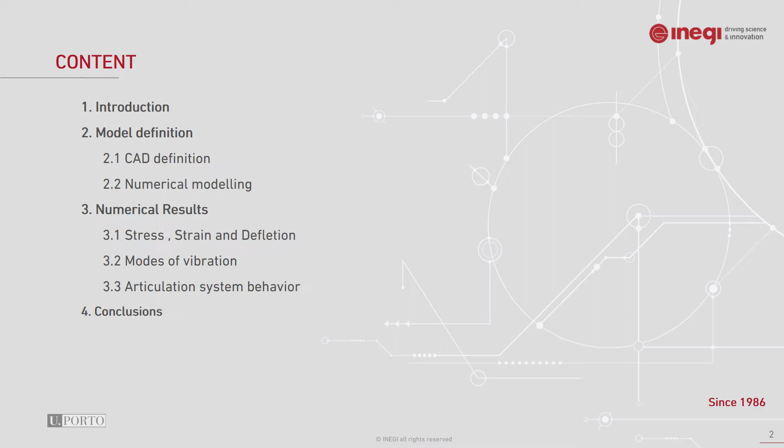Here we present a resume of motivation items for the research here reported. Essential details focus on sustainable mobility, this one making the obvious choice of electric power, lightweight and robust body design, optimized 3D frame type structures possibly, investigation of dynamic force effects on a proposed vehicle body structure. More details you can read in the present paper text. Here, this presentation is shortening the message not to be boring for you.

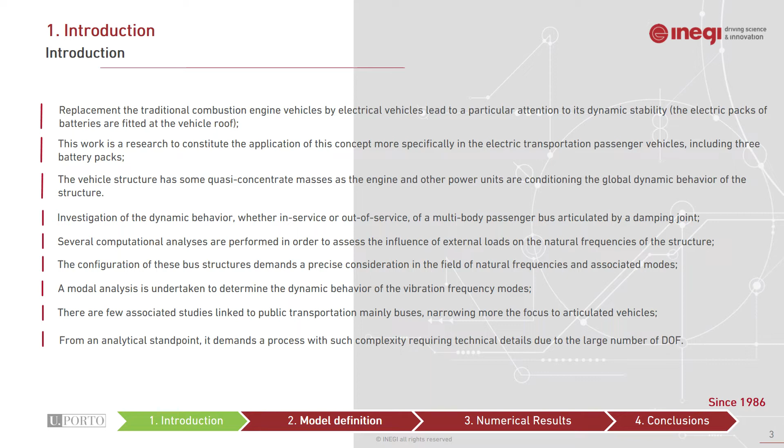Here is depicted a resumed description of an articulated double-body bus about its model characteristics. Each module was modeled as a solid rigid element where closely similar dynamic characteristics as the weight, 3 main coordinate axes, inertial moments, mass center position were sought to match the real vehicle body characteristics.

The problem's outline enhances the attention to a dynamically coupled problem or multi-body dynamics study. Two bodies, assumed as rigid, contact the road via the vehicle suspension, being both modules connected by a specific design, towing double-hinged bar with a damping system for safe road driving control.

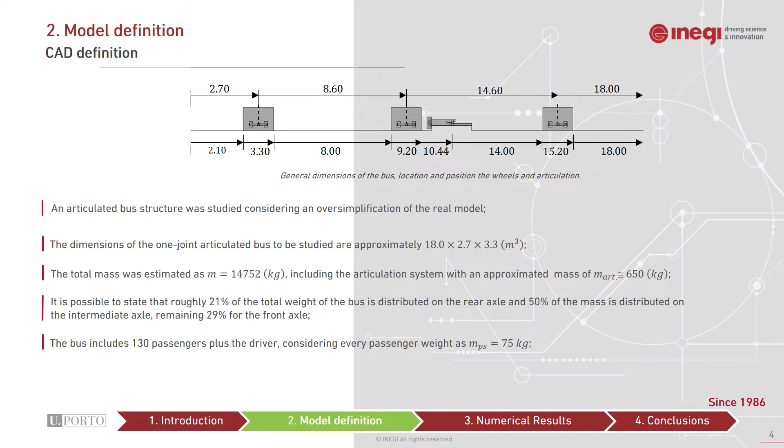Passenger seats and interior isolation material were converted into uniformly distributed masses, while battery banks, if applicable, were considered as partially distributed masses. Proceeding with the dynamic model, we assign the equivalent spring stiffness suspension to each vehicle wheel, having worked as follows.

A. Vertical spring stiffness suspension, radial load, is a series type spring association combining the radial load tire stiffness with the one due to a pneumatic vessel reinforced rubber suspension, respectively K tire and KB.

B. Additional spring stiffness factors existing in the horizontal plane refer to acceleration and braking forces, and they are tangent to the tire external circumference. Also, a transverse force acting normally to the tire circumferential plane completes the force system acting on each wheel.

This last force results of a drift or shear force by lateral loads acting on the vehicle. Take, for example, the effect of a centrifugal force in curved trajectories and lateral wind pressure. This stiffness and the one resulting of acceleration or braking forces have similar expressions.

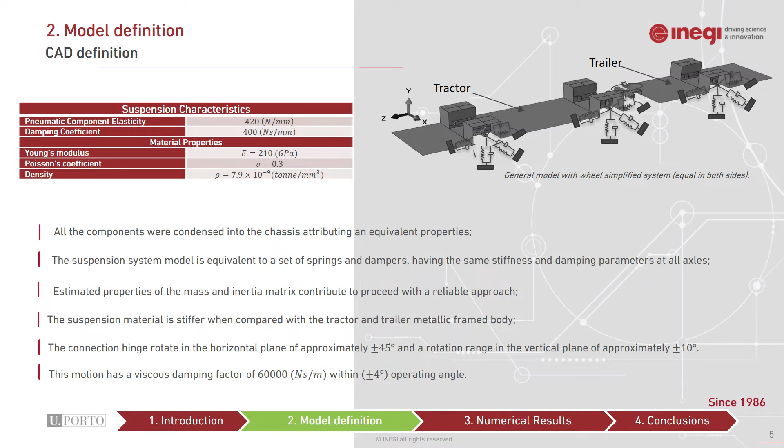Procedures for model simulation. The case study consists in evaluating the modal spectra of two bodies linked by a partial constraint double-hinged towing bar. This device allows only some free rotations, but practically prevents the relative rotation of truck and trailer along the longitudinal axis, for sake of passenger safety and internal vehicle geometry conservation.

All the remaining rotations, though free to occur, have viscous type damping forces by special actuators controlling their amplitude and eventual self-exciting vibrations.

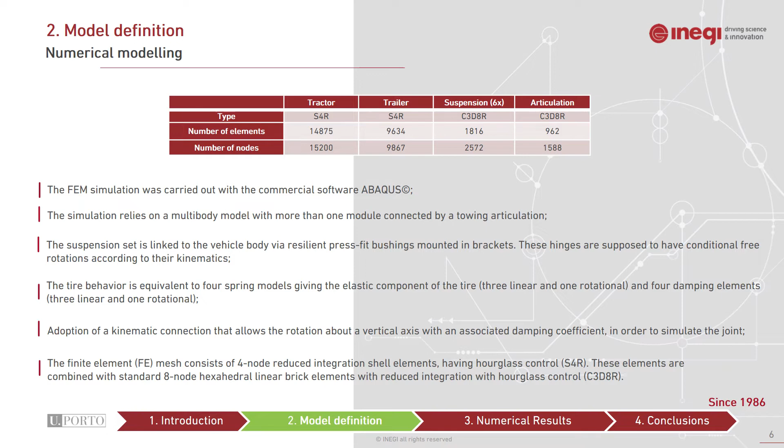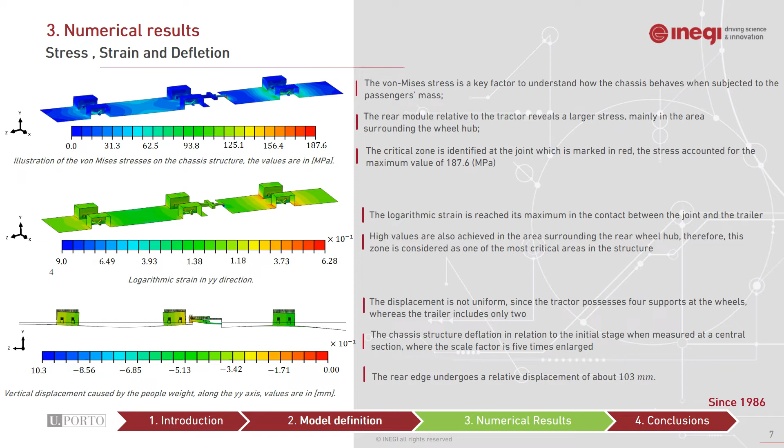The multibody dynamic model required accurate calculation given some rigid body motions by coupled kinematics at the towing hinge bar. Such modes are associated to define the frequencies due to individual stiffness mass characteristics for the tractor and the trailer. However, the two bodies are connected and conditioned by some rotation constraints.

Then, relative oscillations occur only at the vertical symmetry plane and the horizontal plane, this occurring by curved trajectories. There is no relative oscillation over the longitudinal axis of both bodies connected.

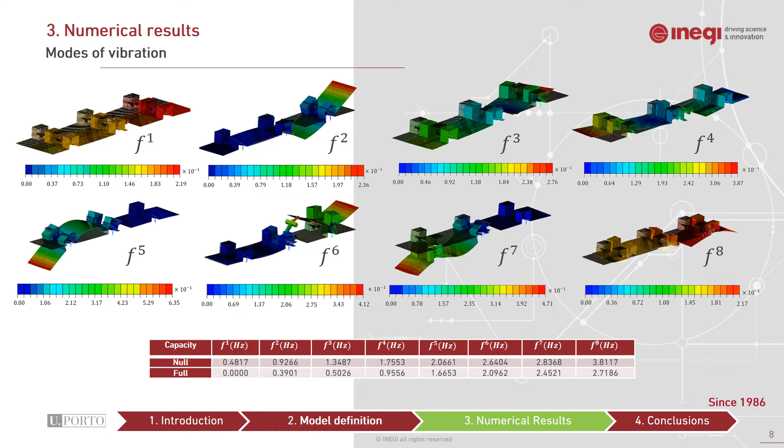This slide reminds in some sense previous data alerting the coupled bodies oscillations that are permitted via the towing double-hinged bar. It is recalled that this towing bar has two viscous type damping actuators preventing self-excited lateral oscillations due, for example, to effect of lateral wind pressure, this eventually leading to less safe straight-run driving.

An additional note left here, it is recalled that frequencies higher than the 8th order previously mentioned modes reflect now the vibration of the body frames, now showing a non-rigid yet deformable body structure. Such excitations can now result from higher frequency road irregularities profile or a lesser mechanical condition of engine supports to chassis. This is applicable in case of reciprocating motors, of course.

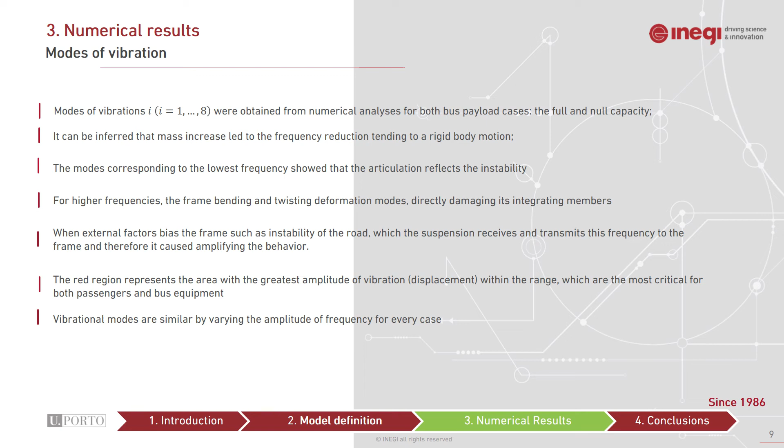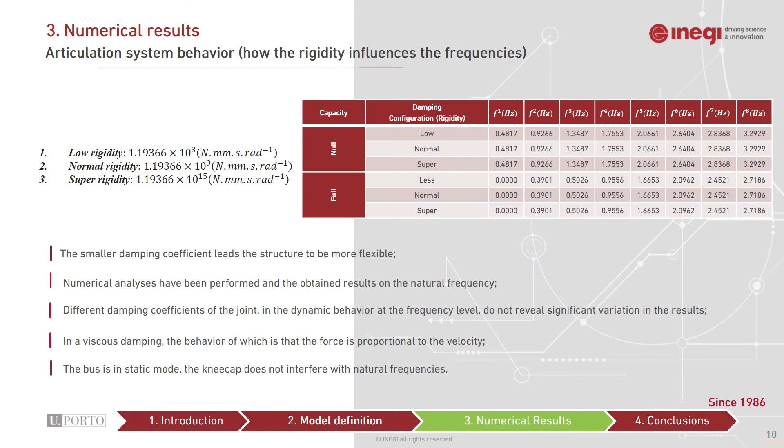This slide discusses the influence of the damping factor of viscous force dissipation actuators fitted in the towing double-hinged bar. It is seen that a damping factor with a base value of C about 1.2 times 10^3 newton millimeter second per radian, calculated for an angular velocity at mutual rotation of the extreme hinges, has practically no influence in the frequencies detected for the lateral oscillation or vertical oscillation of the vehicle.

Conclusions and future research. It is important to note that this work does not present any novel technique or model for dynamic analysis of special design passenger vehicles, as is the case of a double-body articulated vehicle. The numerical analysis for the vehicle natural frequencies led to useful technical information. The lowest frequencies are dependent on the suspension stiffness and damping characteristics.

The highest frequencies of the vehicle dynamics are dependent on the body frame mechanical characteristics, and there is a considerable difference between natural frequencies of the vehicle suspension and those assigned to the vehicle body frame. In large size and heavy passenger vehicles, low natural frequencies are desired for sake of passengers' comfort, but this may render some instability in driving for running on less smooth tracks. Suspension stiffness control is then desirable with most recently developed pneumatic springs.